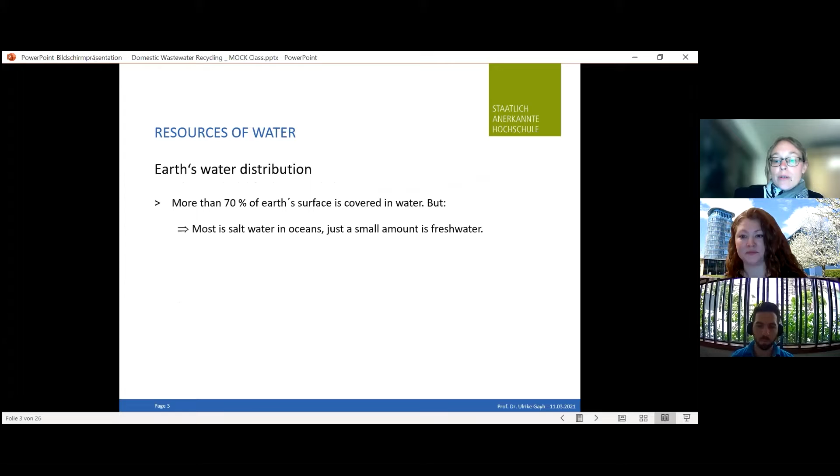Everybody knows that we have a lot of water on the earth, so the water is always there, and more than 70% of the Earth's surface is covered with water, but most of this water is the salt water in oceans, and just a small amount is our fresh water. When you have a look here at this diagram, you see the salt water is about 97% of our Earth's water, and only 3% is fresh water.

Out of these 3%, a lot of the water is in the ice caps and glaciers, so you cannot really use them. And a small part of that is our surface water in the lakes and rivers, which we really can use. So about 1% of the water on the earth is really fresh water, which we can directly use as drinking water.

The most part of fresh water is frozen, right? Yes, the most part, you see here, 69% is in the ice caps. Yes, so the most part is frozen. Unfortunately, you have a lot of that water.

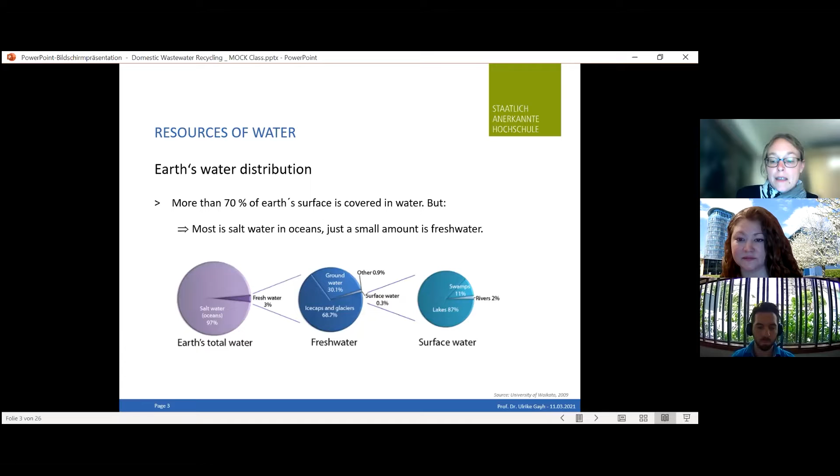To get into the topic, let's start with domestic wastewater recycling now. This is one big part of sustainable water resource management. As you all are living somewhere in your household, you might think about drawing a house, for example, and think about the different wastewater streams which are occurring in your house. So what do you think? What do you have as different streams in your house? What do you have as wastewater when you have a look at your house or your apartment?

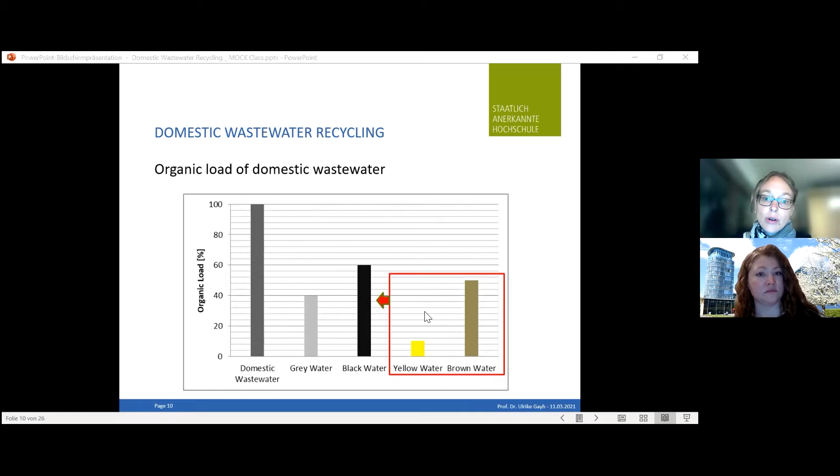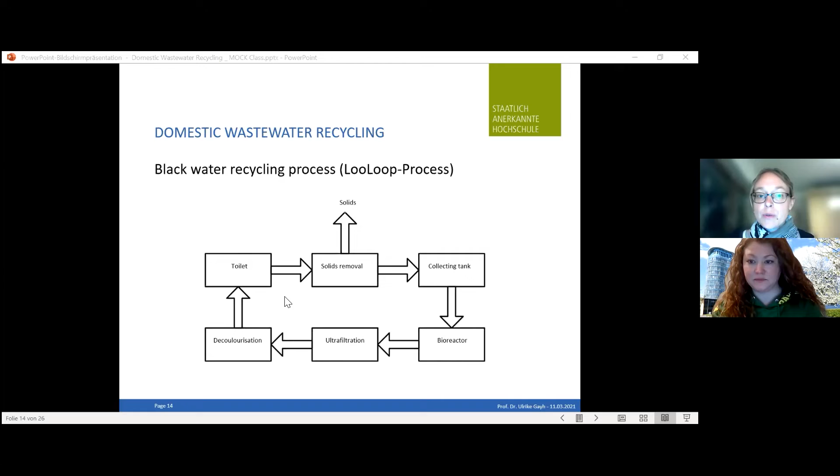That is one process where you save a lot of water, because you use a lot of water for flushing the toilet, as we have seen in one of the first graphs. Other ideas are vacuum toilets, which can be used. Then you don't need a lot of flushing water, so you save water before using such a recycling process.

I come to one example later, which is with the vacuum toilet in combination with gray water recycling processes. Here we have a list of gray water processes. You have here this sand filtration, which one of you has mentioned. This is possible. You have a constructed wetland. These are plants such as reed, for example, which clean your water.

And then you have all the high technology processes which are used in normal wastewater treatment plants or industrial wastewater plants. These are all biological treatment processes, just with different technologies. Optionally, you have a treatment for disinfection, which can be done by UV or ozone treatment.

And then you have different applications, and depending on the application, you need to check if you need to use optional treatments. If you have potable urban uses, of course, you need a disinfection. When you use it for landscape irrigation or agricultural irrigation, you don't need to have a disinfection.

So for the gray water, the two processes here at the top, the sand filter and the constructed wetland, are, in comparison to the technologies below, very cheap processes, but they are completely sufficient for the gray water, as it's not that polluted.

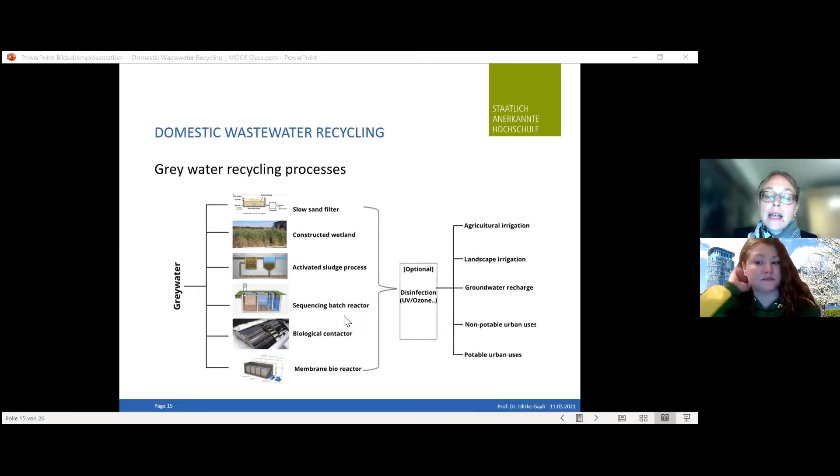So when we normally do this lecture, I just wanted to show this review of my lecture of environmental engineering. Here we draw the houses with the different streams, which we talked about at the beginning. We also have the bottles of different wastewater streams to have a visual aspect of it. And then we create scenarios for how to treat that.

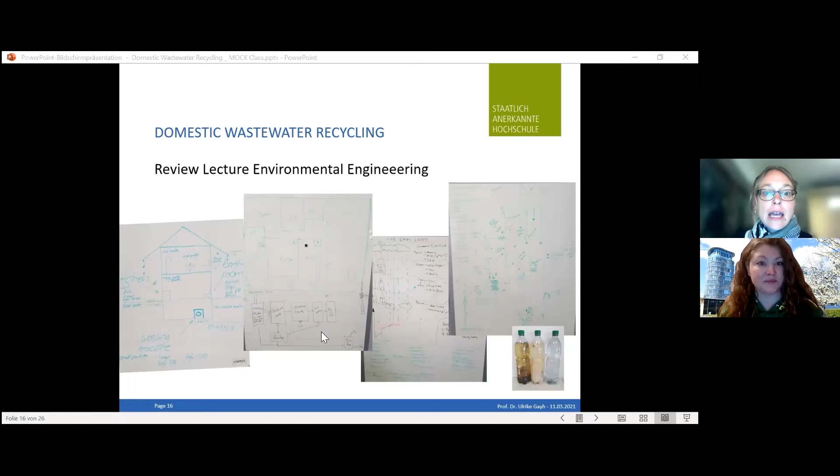So we don't have that much time. That's why I just present some possibilities to do these scenarios. And I want now to come to real application examples which are used here in Germany, which we have visited.

One example is a student residence. It's called Eastsite, which is in Mannheim, a big city near Heidelberg. And here we have a gray water recycling process. We have filtration, a biological treatment, and an ultrafiltration. And this water is reused for toilet flushing.

So like the black water LooLoop process which I have shown you, this can also be used for the gray water. Here you can also reuse this gray water with quite an easy treatment for flushing. Here you have a photo to give an impression of how these student residences look. And in the cellar, you have the tank for the gray water, your treatment, and then your clean water, which is used for toilet flushing.

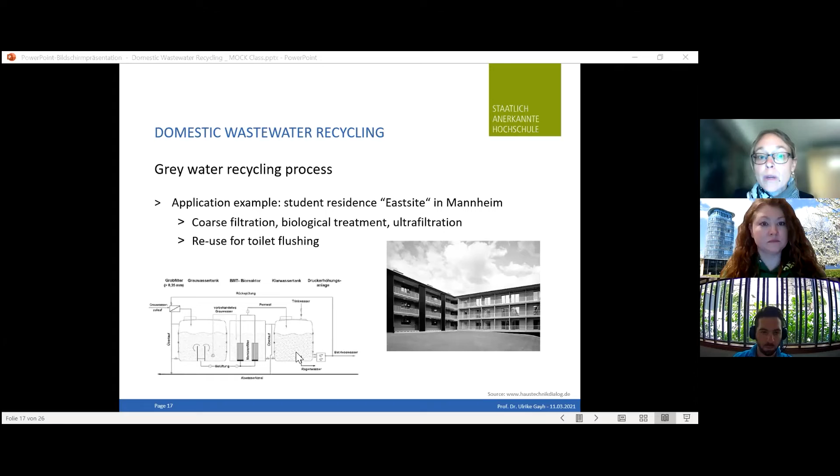Normally 44 liters per day are used for flushing the toilet for one person. Around 200 liters are the whole water consumption. So you save a lot when you have recycled water for toilet flushing.

Another application example is a whole area. This is a whole residential area in Germany, and it's quite an ecological village with different aspects which we have talked about. Here we have a vacuum toilet, so we don't have the flushing water. Vacuum toilets you might know from trains or planes. Then you only have the black water, so the volume is not that high.

And with this black water, you go into a biogas plant, as in one of the examples before. With the biogas plant, you gain biogas, and with that you have heat and electricity. So this village gets its heat and electricity out of this black water. In addition, you have the kitchen waste, the bio waste. You also put that in the biogas plant.

Furthermore, you have a storage for the digestate, which you can give to agriculture for fertilizing. Then our other water, when we talk about source separation, is our gray water. Here it's showing once again shower, bathroom, washing, the main sources from the washing room and also from the kitchen. Here we have a reed bed filter, so a constructed wetland.

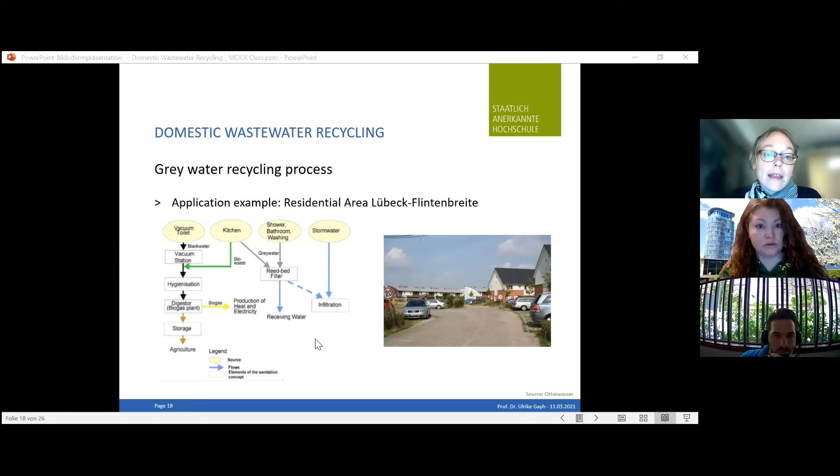But our gray water, which is not that polluted, it's completely possible, as the substances such as nitrogen and phosphorus are much lower. So this is our main example of how you really can use it for a whole village.

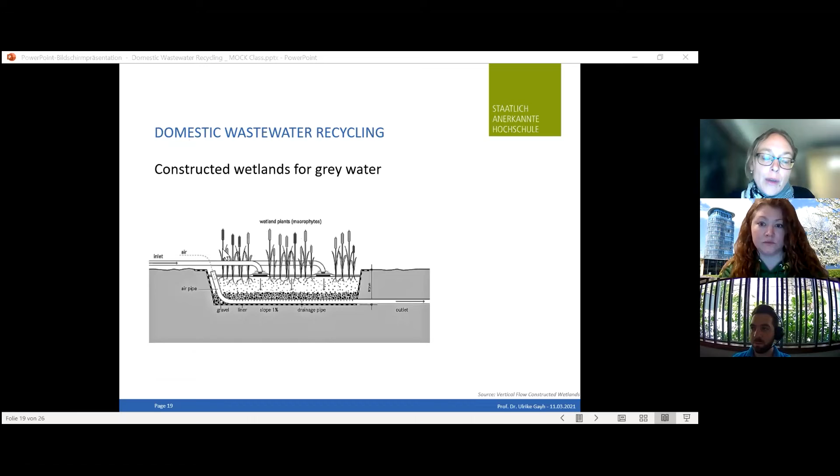Here, as I talked about the constructed wetlands, what is really a constructed wetland for gray water? You have here plants. So here you see, I put also some pictures from a constructed wetland which I have worked with. You have different plants which are cleaning your water. You have here the inlet.

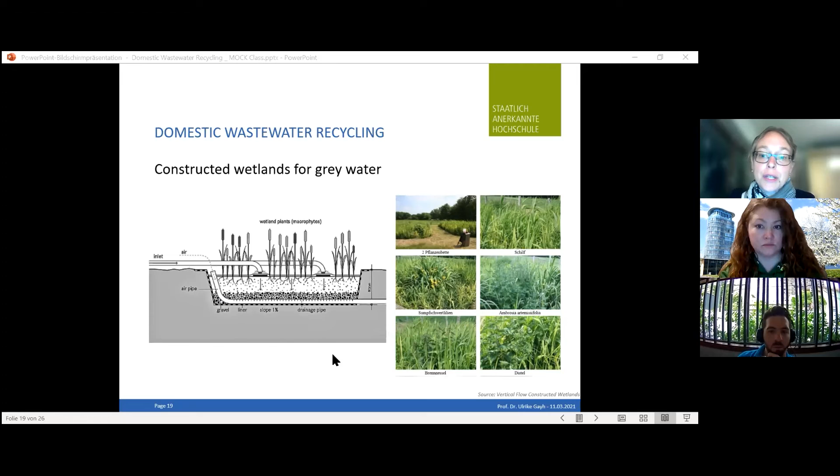You also, of course, need some air for the treatment, so that's why you have an air pipe as well. And then you have the water, and afterwards you have the clean water. Of course, you also need to do water quality tests. But as your gray water is not that polluted, such a simple technology is sufficient to clean the gray water.

When we talk about this domestic wastewater recycling, I also want to go shortly to another topic, which is often combined with this aspect now in the research. This is the future of roof greening in cities. So you know that climate change has a big impact also on the cities because they're heating up in the summer. But trees or green are cooling that due to their evaporation effect.

So possibilities are that you collect and store the rainwater for use in toilet flushing or in washing machines, so you save water. Others are that you clean the gray water on the roof surfaces of houses or also car parks in constructed wetlands or also in biofilters. So this is possible. Or you can also use your purified gray water for irrigation.

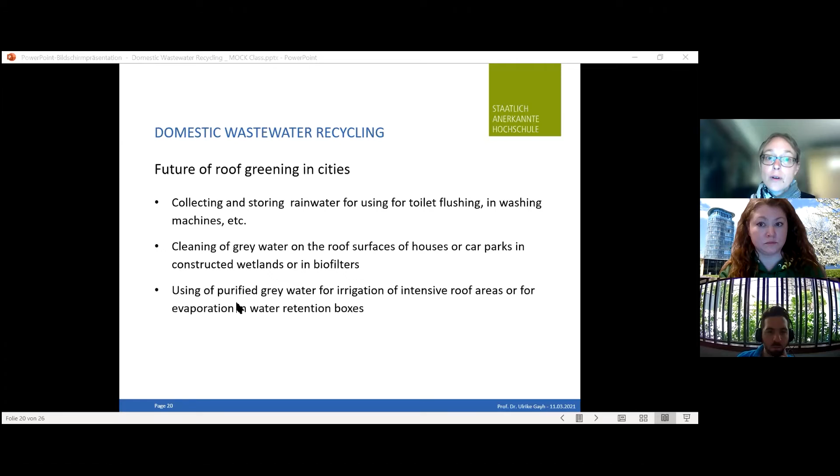For example, when you have really intensive roof areas, or when you have big cities with hot summers, you can use it for evaporation in water retention boxes. So with this domestic wastewater recycling, in the field of blue-green city approaches, you can use this aspect for domestic wastewater recycling as well.

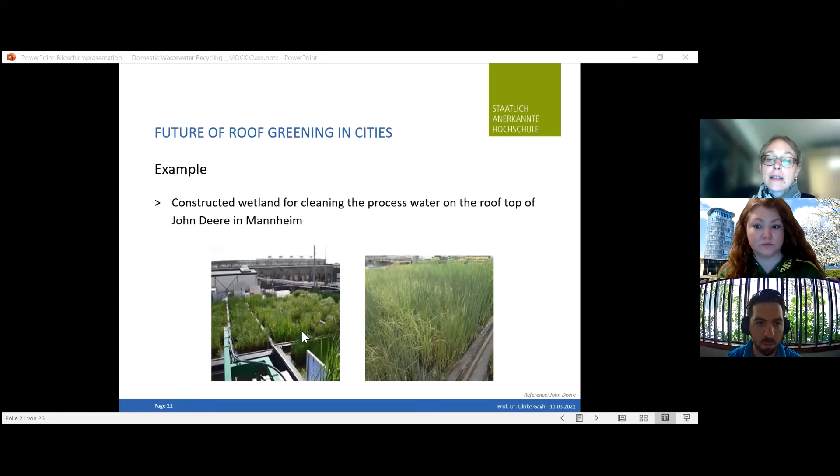Here is one example of a constructed wetland on the rooftop, as you can see in the picture. It's used for cleaning process water, so not domestic wastewater, but process water. It's on the rooftop of a company in Mannheim, John Deere. So they're using it to recycle their process water, which is also not that polluted.

One aspect for roof greening, I just want to show you this new area. It's called Goethequartier. This is in Offenbach, and this is a pioneering concept of rainwater management. They use all the rainwater which is coming. They store it. So with this roof greening, they also fight against flooding in rainy seasons, as we're also having some floods of our rivers here in Germany.

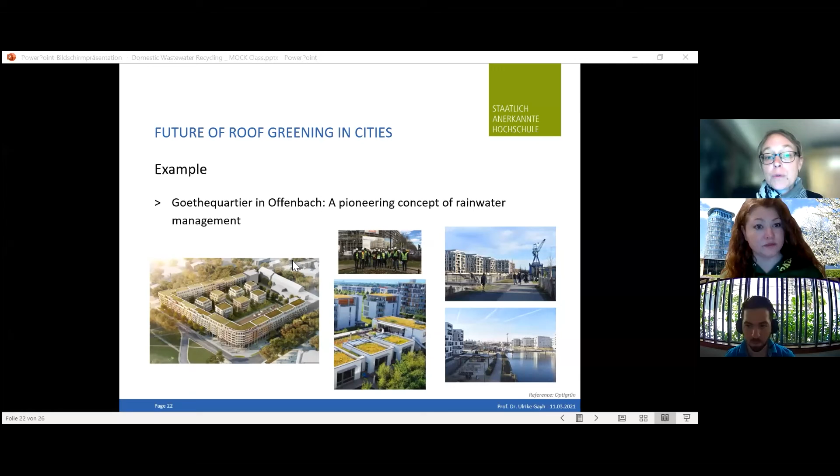So this is just one example, which is not directly linked to domestic wastewater recycling, but as we talked about at the beginning, rainwater is one source in domestic wastewater. We can also use this for greening up the villages or cities. That was my last example. So thank you for your attention, and just let me know any questions you have.

So thanks, Professor Ulrike. It was really interesting. And I have a couple of questions. We are also streaming on YouTube, so I have my personal questions and some that were written on YouTube. And you students can also open your microphones and video to ask anything you want.

So during your talk, I remembered a video that I saw with Bill Gates. They started with black water, actually, and it's a filter in an initiative that Bill Gates was investing in. And at the end, he drinks the water that was derived from the black water. So I would like to ask if you saw this video and what sort of filtration it uses.

So I know that video, and when I worked more in the field of domestic wastewater recycling while doing my PhD, my old professor was also doing the same, because we had such a process cleaning the black water, and to show people that it's clean water, the best is to drink it. So that's why he also did that.